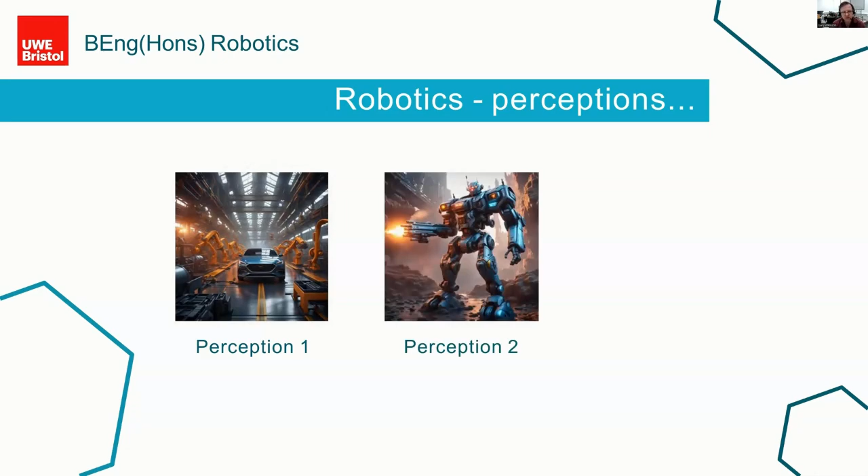First of all, they might think about automation - for example, a car being manufactured at a huge plant. Second, they might think about robot warfare, like Terminator or something like that. A third thing they might think about is hobbyist robots, things like toys. These are obviously quite negative connotations - losing jobs, warfare. There's not exactly a negative connotation with toys, but it's not exactly positive either.

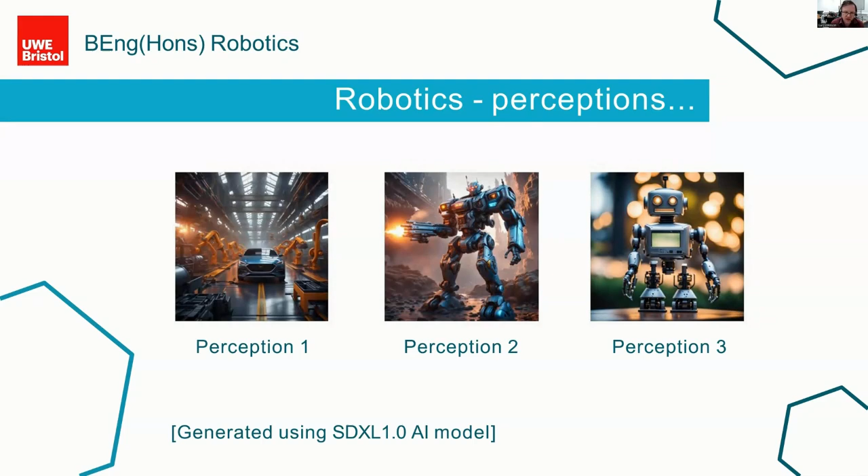And actually, the truth is, when you look at the reality, well, there is some truth in that. I'm building a career in robotics, and robotics is my life, but it's not my job to pretend there aren't pitfalls and problems in the field. If you came to do my program here, I wouldn't shy away from talking about some of the dangers we might face in the future. But it's important to put everything into context, because there are also huge potential benefits to the individual and to humanity within this field.

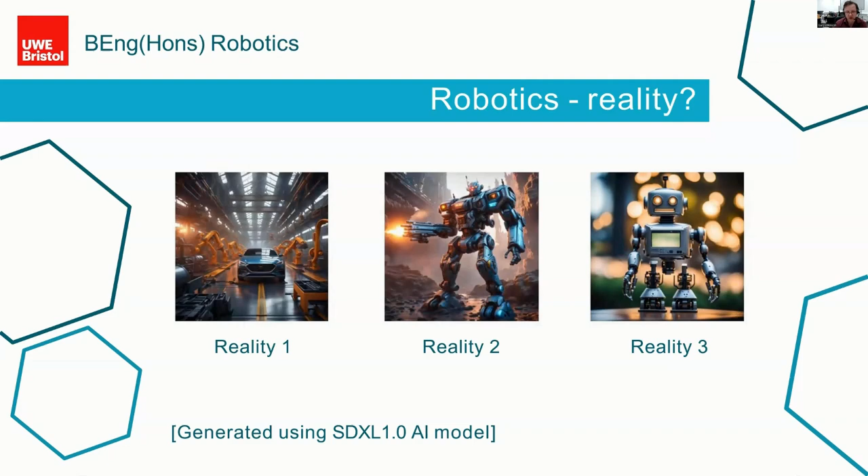And then finally, we also have an aging population, especially in certain parts of the world.

Robotics, we think, is one of the key technologies we can use to help support an aging population, when we might not have the resources to have nurses visiting every 80 or 90-year-old in their home every day. So robotic assistance is potentially making a big difference there. I'm not going to shy away from some of the challenges we might face, but it has to be put into context of all the huge benefits of the technologies being researched at the minute.

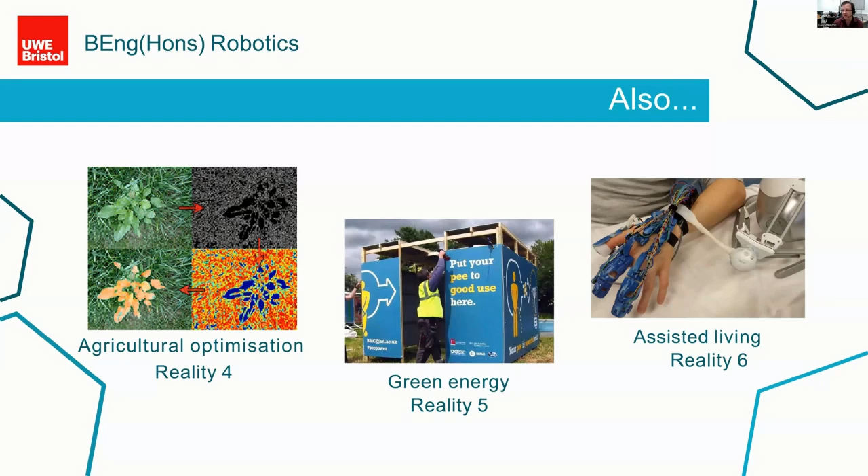So that's a bit about the background of what robotics is and what it can do. The other interesting thing about robotics for me, and one of the reasons why I like working in the field, is it draws together so many different disciplines. I'm from a background of pure sciences, originally physics, and then I did a PhD in computer science.

It also has many application areas, from home entertainment through to medicine. We talked about healthcare already, security, space technology, and so on. Here in the BRL, almost everybody I speak to, every new person that comes my way, seems to have a different background to everybody else who works here. Whereas my original background in physics, everybody had a degree in physics, here in robotics you've got computer science, physics, maths, and so on.

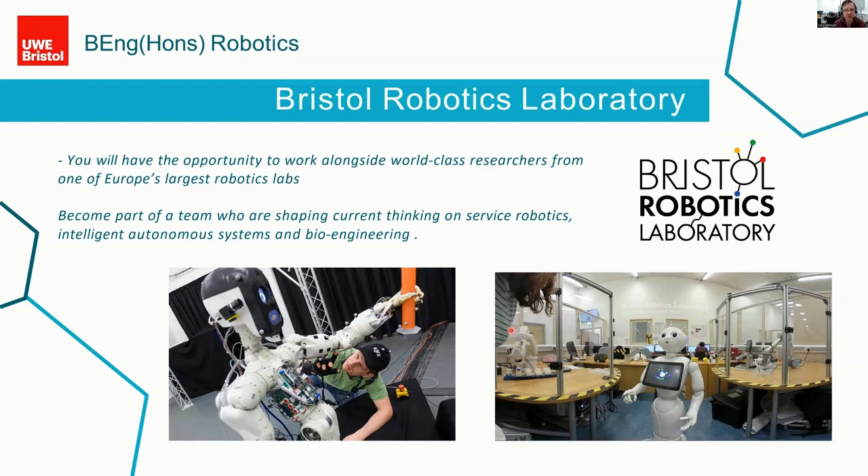The first thing about robotics is you can think of it as a sub-discipline of engineering. A lot of the skills and techniques that mechanical or civil engineers need overlap with robotics. We all need similar mathematical skills, for example, or teamwork skills. So for some of our modules, we link together all of the engineering students, about 500 students or so, and put them into groups to work on a big world engineering problem.

It could be about water sanitation and things like that. What's quite nice about that is we see students from mechanical engineering bring in one particular set of ideas, and then someone from robotics, maybe more from a programming point of view or control theory, and then you have some mathematicians. So they all bring something different to the project.

Another example, which is a module more closely related to robotics specifically, is in microcontroller applications. Control and control theory is a big part of the field of robotics. It's not just about switching a motor on and off, there's lots more complexities and intricacies than that.

One thing we do is use these tiny little robots that we can program, with lots of sensors on them to detect if they're near a wall, and we have a little competition to navigate through a maze, because that brings together a lot of the skills you need in the field, from electronics, sensors, computer vision, path planning technologies, and artificial intelligence, which I'll talk about a bit later.

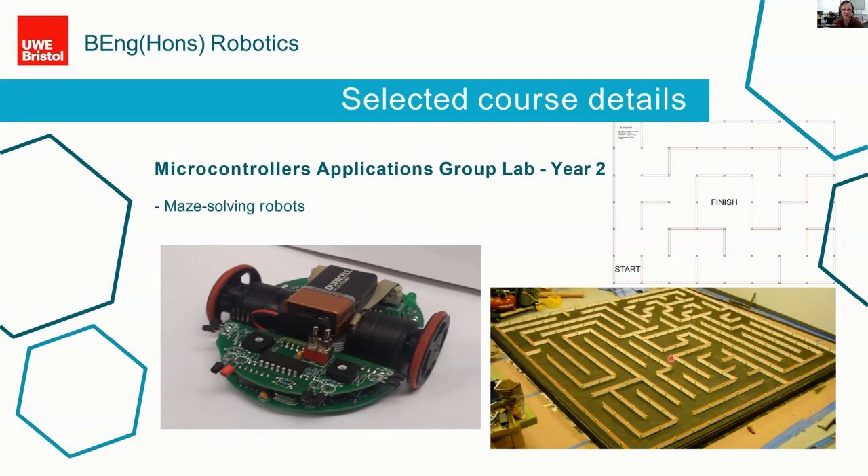Then what I do is take what they've done and use a technique called transfer learning, which takes this really general application of AI and fine tunes it to one specific thing. So rather than having to use millions of images to train my network, I just use 100 or so - maybe 50 images of each of these cats - and then retrain the network so now it can recognize a new image of a cat.

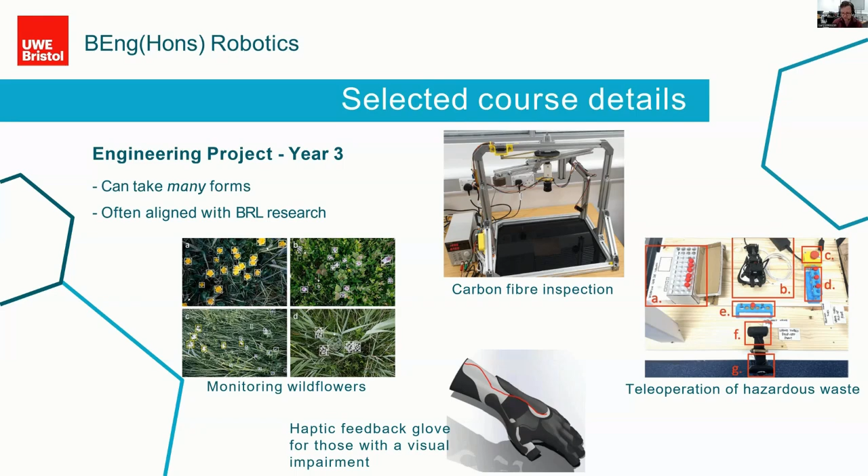I often get asked, if I'm running an open day, where people go to when they finish. That's actually quite a hard question to answer, and an easy question to answer, because people go to so many different places, including places you might expect like Rolls-Royce or Airbus, especially where I work in Bristol which is well known for the aerospace sector. But also completely random places like Coca-Cola or Britvic, companies not exactly known for robotics, but all of these have massive warehouses and factories with equipment that's got robotics, that needs control theory, control engineers, and quality assurance. So the catchment is huge if you work in robotics.

It's also worth noting that we're signed up to GradLink, which is for international students in particular. If you go back home or to a different country after you graduate, you still need some support, so we've signed up to the extra support you can get via GradLink. So you won't be on your own after you graduate.

Now, I organised a couple of field trips recently. Just down the road from here we've got the National Composites Centre. Don't worry too much if you don't know what a composite is, you can Google that later, it's not integral to this talk. This is basically a manufacturing and research centre, and it uses lots of robotics, as you can see, for the manufacturing process.

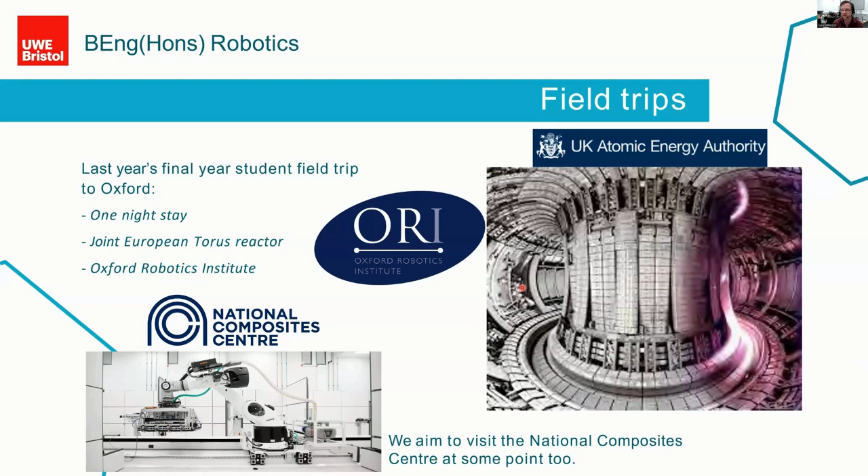Funny enough, one of our graduates actually went there, so he worked there. RACE is, as you can see, Remote Applications in Challenging Environments, which is affiliated with a fusion reactor, and he's working on these cool robots now, to enter places you can't realistically put a human operator.

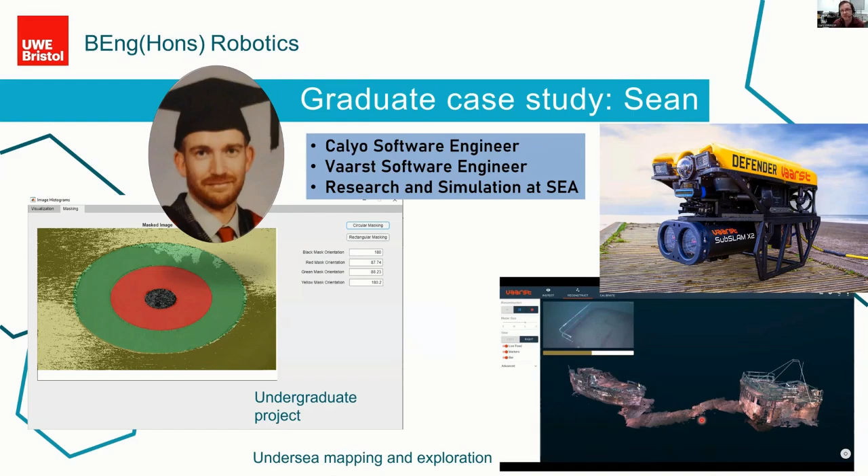So that's just two examples, but as I mentioned, there are many destinations that people can go to in robotics.

As we're nearing the end of this presentation, I want to talk a little bit about where the future trends are. This is another thing I get asked a lot about - what is the future of robotics? You might divide your answer to that question into two: one relating to machine learning and AI, and one relating to everything else.

So we'll talk about machine learning and AI. If you're wondering what machine learning is, everyone will give you a slightly different definition, but my definition is that machine learning is the hard bit of AI. Really, machine learning is the bit that takes all the data in the world or in a database and works out patterns from it, and then allows us to do what we want or extract information from that. AI is kind of that plus a few bits on the outside.

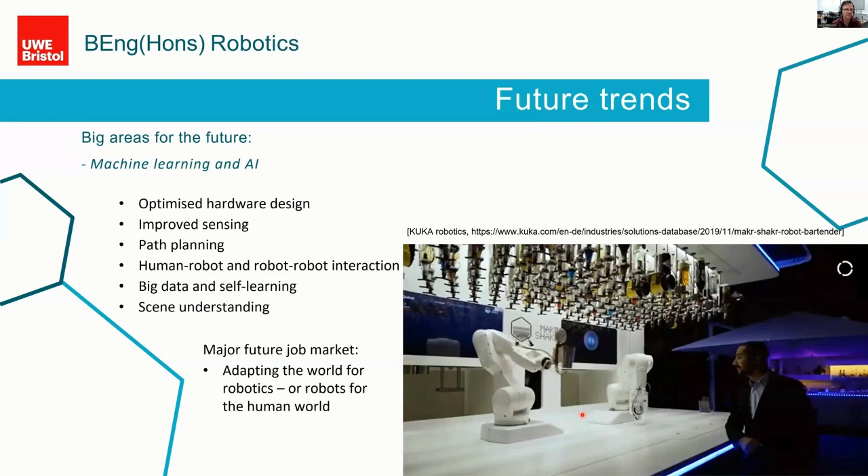Other areas are worth mentioning though as well. I'm particularly interested in soft robotics. That's not my main area of expertise, but I'm interested in it because I see a lot of future potential. Soft robotics is just as its name suggests, robots that are soft.

Okay, why would we want soft robotics, you may be asking. Well, to give you an example, if you want to pick up a glass, your fingertips are soft, aren't they? So when you pick up the glass, you can gradually sense that you're touching it and then pick it up gently. A traditional robot arm is made from metal or something, and the gripper at the end of the arm is not soft, so it's quite difficult to train the robot to pick up a glass without breaking it in such circumstances. It's possible, but it's difficult.

So soft robotics is the field of making sure that parts of the robot are soft enough that it can interact a little bit more seamlessly with the world around it. And then people have taken that to the next level.

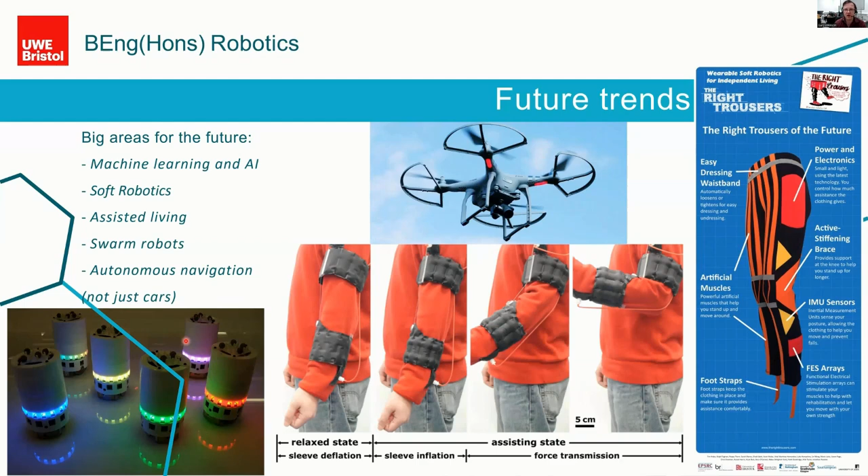So what's my advice to you moving forward, other than to study robotics, especially on my program, which of course is the best program? So here's my four tips. The first tip: don't forget the basics.

Okay, if you want to be good at robotics, you still need to be good at maths, and also get practicing coding. Python is generally slowly becoming the standard language for robotics, but you could use C or MATLAB as well. So get learning coding if you've not already done it, and the more you practice, the better you'll become. Learning a programming language is just the same as using a different language, French or Spanish or whatever - the more you practice, the better you'll get.

Second tip, and I have to admit I struggle with this myself sometimes, is to keep up to date. It's so hard to keep up with the latest hardware and techniques out there, and even I struggle with it. But just keep an eye on the news, look at some of the latest papers being published in the literature.

Don't always trust what you see in the news, of course, because often you'll see something claiming some research is going to change the world, and it doesn't happen. But try and keep up to date, and also the law as well will be changing a lot, I think, over the coming decades.

And also talk to people about it. Visit universities and chat to people about what they're working on. You can contact people on LinkedIn and things like that. There's a lot of rubbish on the internet, though, as well as a lot of great material.